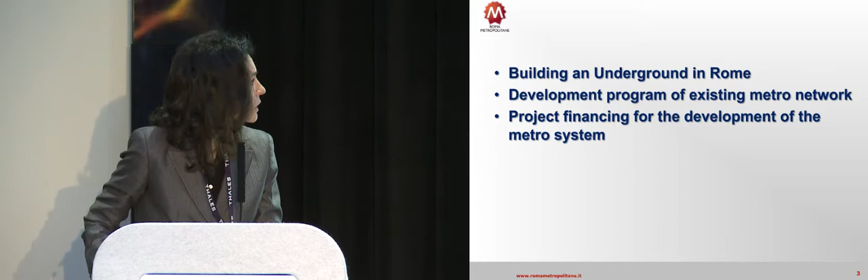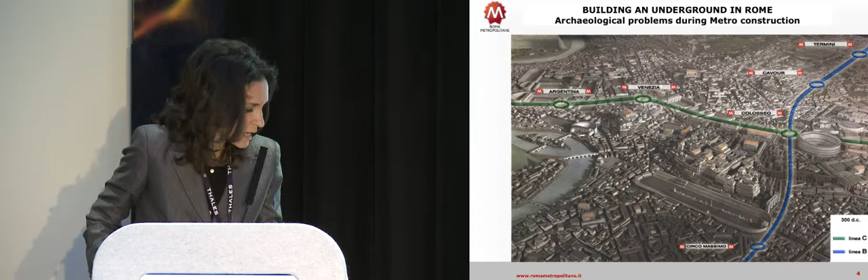This is nice for me, thinking that we are going to live over all this stuff in Rome.

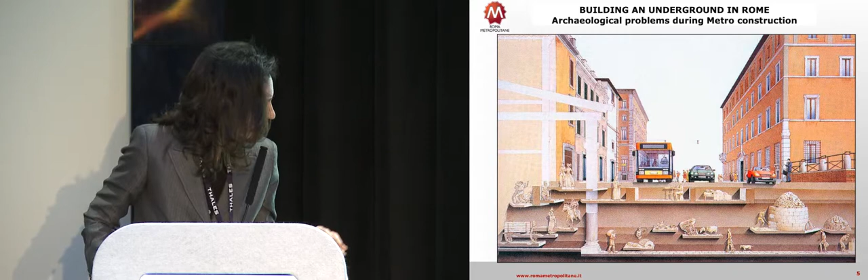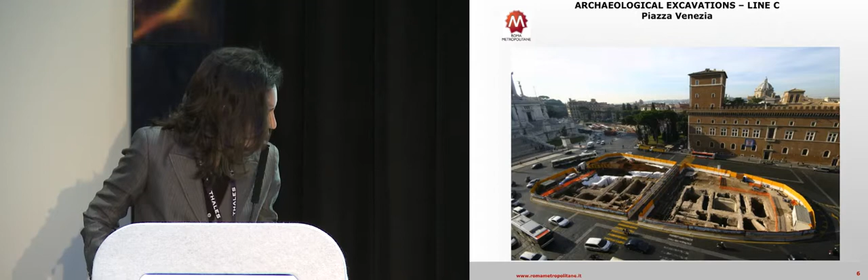These are some archaeological excavations preliminary to the excavation of the station in Piazza Venezia. You can see Altare della Patria. These are some walls of ancient buildings before the excavation of Via dei Fori Imperiali. Thus we have the walls of the building, Palazzetto Venezia, medieval age, and Piazza Madonna di Loreto, in front of the Altare della Patria.

In Rome we have up to 15 archaeological layers, each one connected with a specific age, from prehistoric on Palatino Hill to imperial, archaic or medieval, Renaissance, Baroque, and so on.

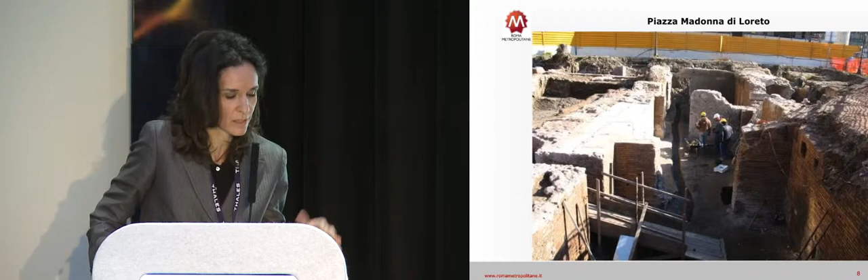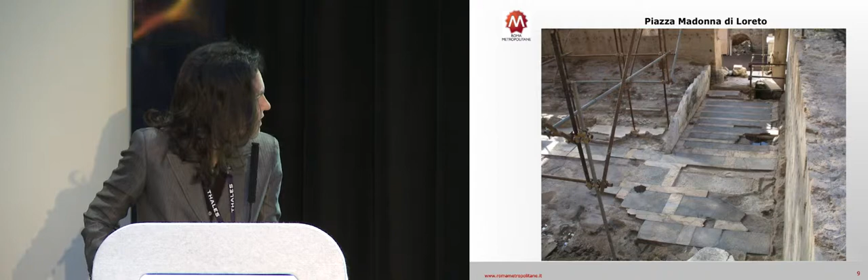This is some marble pavement in Piazza Madonna di Loreto. This is the reconstruction of the Athenaeum of Imperatore Adriano in Piazza Madonna di Loreto.

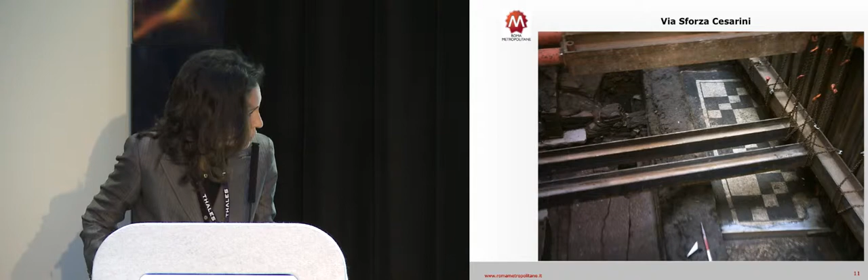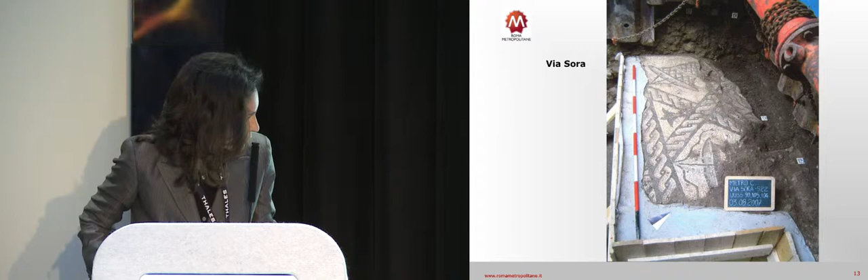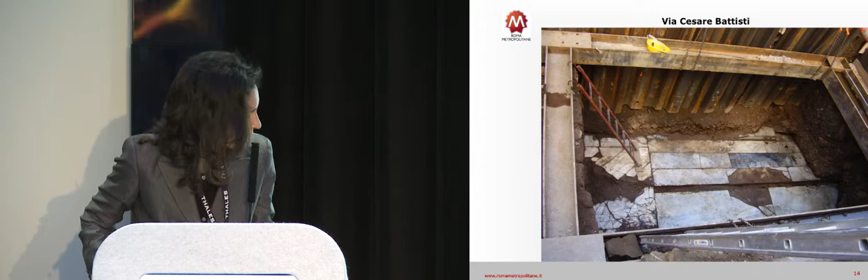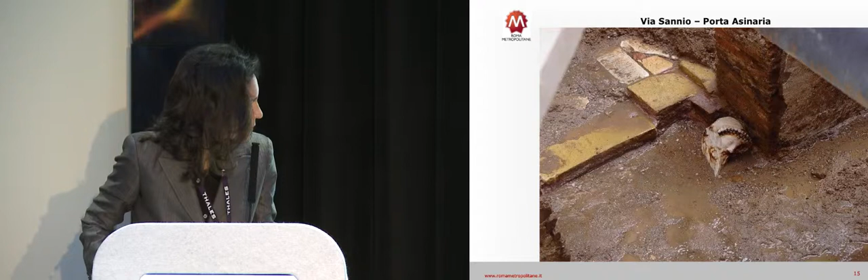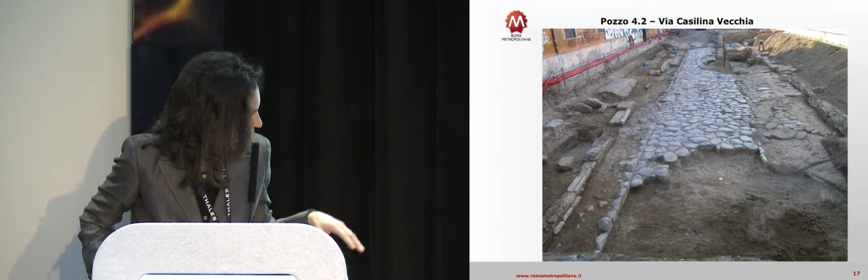This is some Roman amphoras in Largo Brindisi, next to San Giovanni station. Via Casilina Vecchia, in correspondence with ventilation shaft 4.2, under this pavement we found the ancient Via Labicana. This is a panoramic view of that pavement.

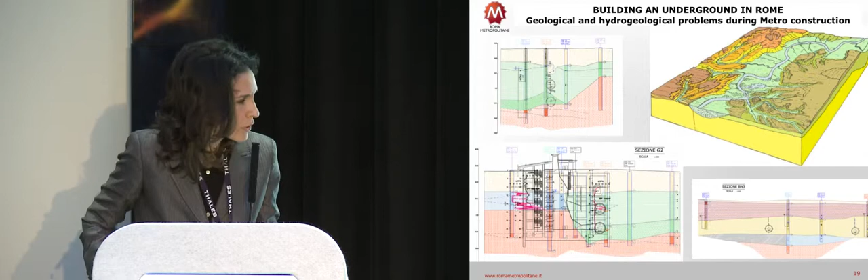Moreover, we have geological and hydrogeological problems, as Rome is in the Tevere Valley, so we have alluvial and recent sediment soil with very poor mechanical characteristics and high deformability, so we have to consider this fact in our design stage. Also, the water level is very high, and we have to keep the water level unchanged in the surroundings to avoid any settlement to buildings and ancient monuments.

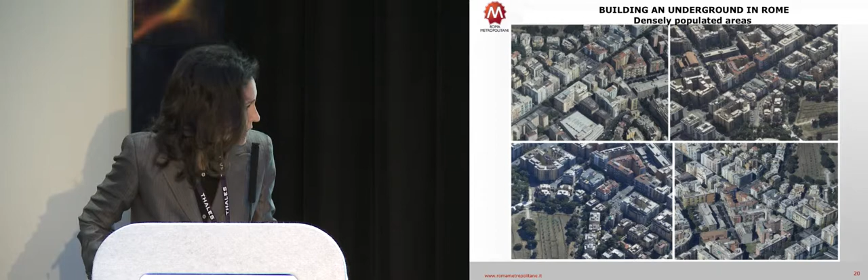Therefore, we have to consider that building an underground, we have to build it in densely populated areas, so we often have no place for working areas nor for stations.

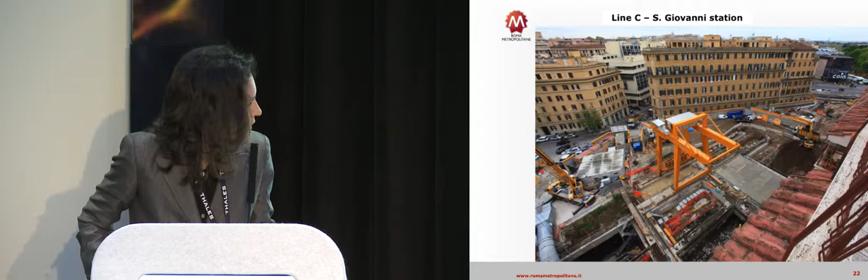Here we have some panoramic views of our works: San Giovanni station, Lodi station, along the C line under construction.

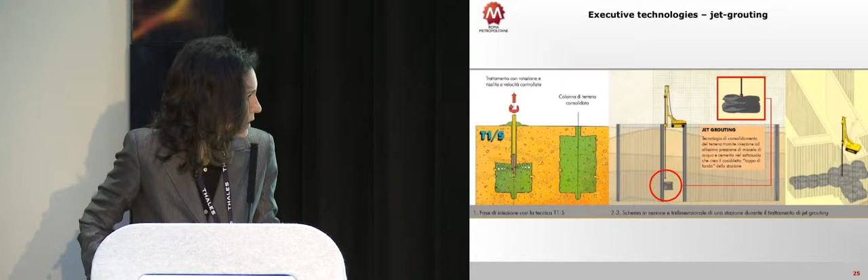We have to face all these problems with executive technologies like trench cutter. We have to build stations and ventilation shafts from the surface between diaphragm walls until 15 meters deep. We also have to use jet grouting at the bottom of the excavation to reduce permeability of the excavation and to improve mechanical characteristics of the soil.

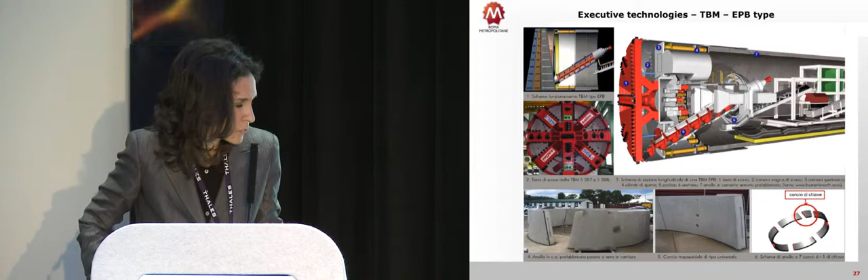We also use ground freezing and compensation grouting for buildings, and the tunnels are being dug with TBM, EPB type, to reduce settlement and to avoid any risk to monuments and buildings on the surface, and to avoid disturbing archaeological strata. Very deep, until 50 meters deep in the center of Rome.

The final result of all this effort are very livable stations, free of architectural barriers, and the internal passages are designed to be densely used, and when possible, are completely fully automated.

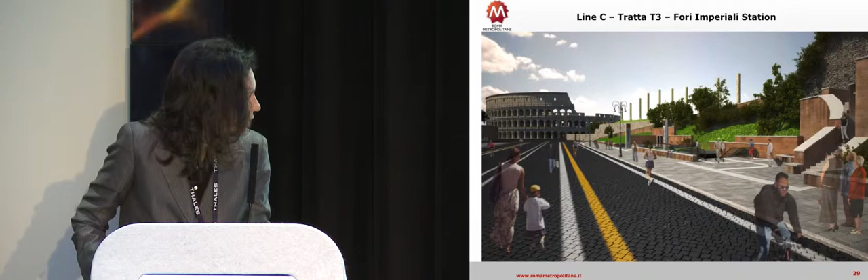In the center of Rome, escalators and stairways are completely uncovered to minimize and reduce the impact on the environment. Also, lifts completely glassed in are located so as to avoid impact with the locations.

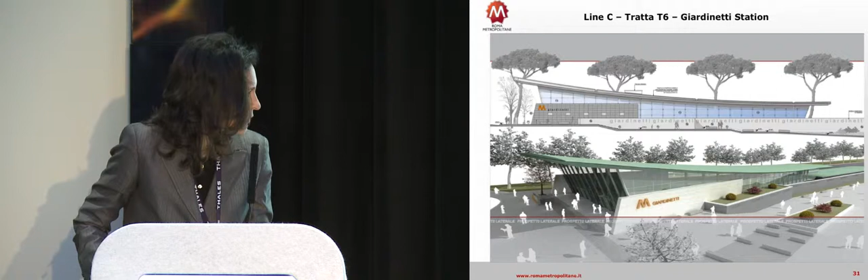In the suburbs, stations are planned to be strongly recognizable, a sign for the urban environment, places of urban aggregation. All material, finishing, and signage are planned to give a sense of unity and also comfort for passengers.

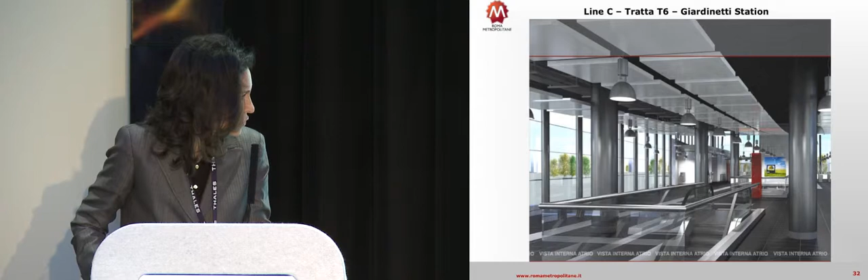All the stations are planned to be safe, as Line C will be the first line in Rome using the safest and most efficient system, as it will be fully automated with platform doors that will open only when the trains arrive in stations. The system will also increase capacity, as trains will be more frequent when requested by demand at peak hours.

We also have a system of video surveillance in and out of the stations and into the trains. We have a Wi-Fi system to receive and transmit telephony data, and this will be extended from Line C to all the stations and to the whole network.

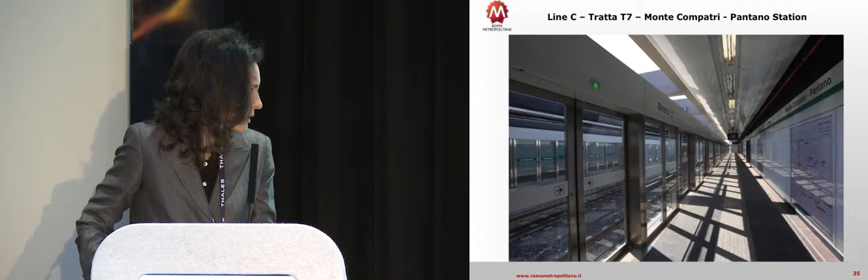This is a view of our developing plan. Under construction, we have this.

Our Line B1, from the existing Line B station Bologna to the external Great Ring Road, is 9 kilometers of tunnels for 9 stations, and this part from Bologna to Stazione Ionio is under construction. Functional tests are in course. This part of the line is in the approval and financing phase.

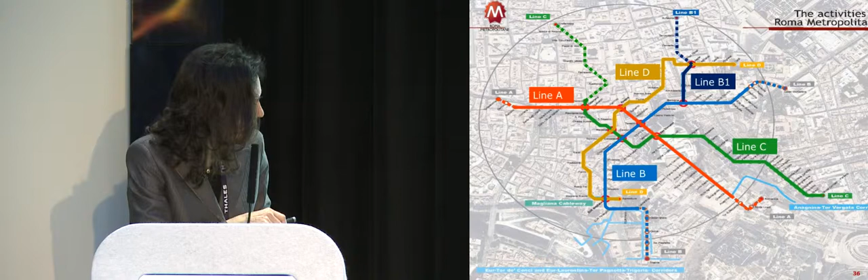Then we have the fourth line, Line D. It connects the dense neighborhoods to the south to the northwest part of the city. We also have the extension of Line A: 2 stations, 2 kilometers of tunnel.

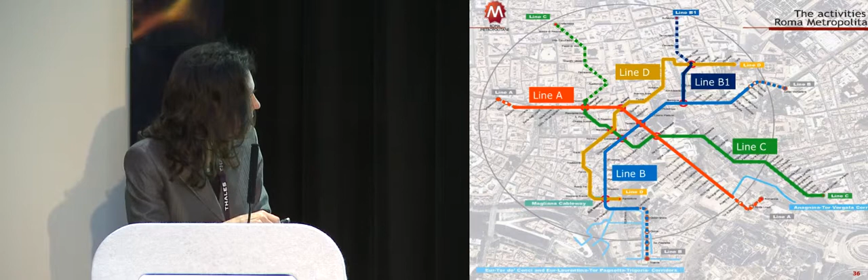Then we have also planned this track, from Clodio Mazzini to Grotta Rossa, around 9 kilometers of tunnels. And we have the current work, Line B1 and Line C.

The first part to be opened is the track from Monte Compatri Pantano to Parco di Centocelle, 15 stations. Then at the end of 2014 will be opened the track between Parco di Centocelle and Lodi Station. At the end of 2015 will be opened this last track.

At the end of 2017, the track will be opened until Colosseo Station.

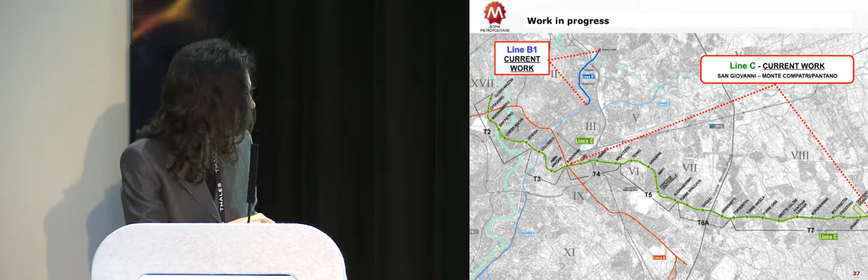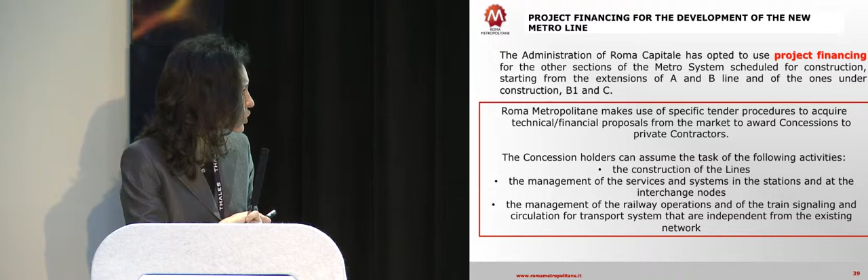Probably the C line will be the last big work fully financed by public administration. So the administration of Roma Capitale has opted to use project financing for the other sections of the metro system, starting from the extension of Line A and B and the ones under construction, B1 and C. Roma Metropolitane makes use of specific tender procedures to acquire technical and financial proposals from the market to award concessions to private contractors.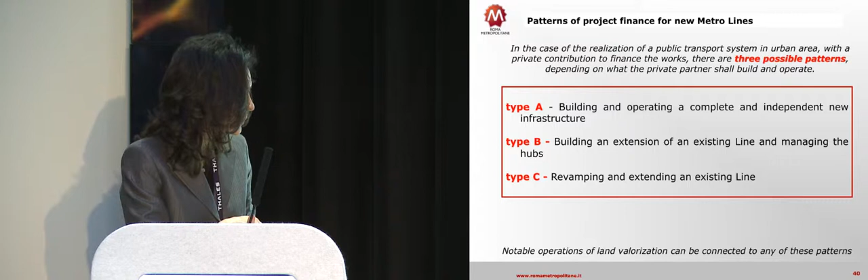We used to say that we have three different patterns of project finance for new metro lines. Type A: building and operating a complete and independent new infrastructure. Type B: the partner builds an extension of an existing line and manages the hub. Type C: he revamps and extends an existing line.

In pattern type A, we have the case of line D, which is the most suitable for an independent metro line. It's the clearest pattern from the point of view of the transfer of management risk, because it avoids any confusion in the allocation of responsibility when a disservice occurs. So for line D, the concessionaire will conduct preliminary investigation, develop the project, build the line, operate the rail system, and manage the service of the station and hubs for a 20-year concession period.

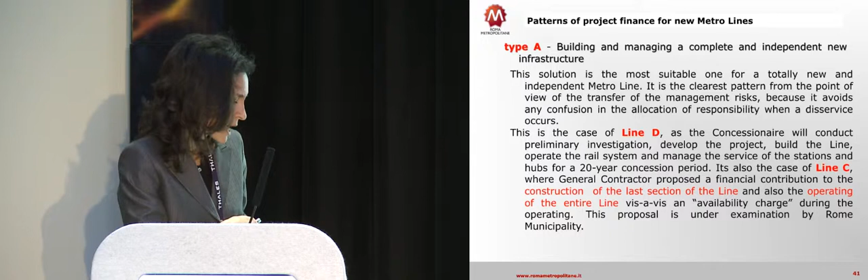It's also the case of line C, where the general contractor proposed a financial contribution to the construction of the last section of the line from Clodio Mazzini, for the line from Venezia to Clodio Mazzini, and also the operating of the entire line vis-à-vis an availability charge during the operating. This proposal is actually under examination by Rome municipality.

For type B, the private partner in the station and hubs provides the maintenance and the surveillance of structure and plants. It can also provide a welcome service besides carrying out subsidiary commercial activities. Instead, the management of the transport service, including the purchase and maintenance of the rolling stocks, remains with the previous handler. This is the case of the extension of line B, B1, and line A.

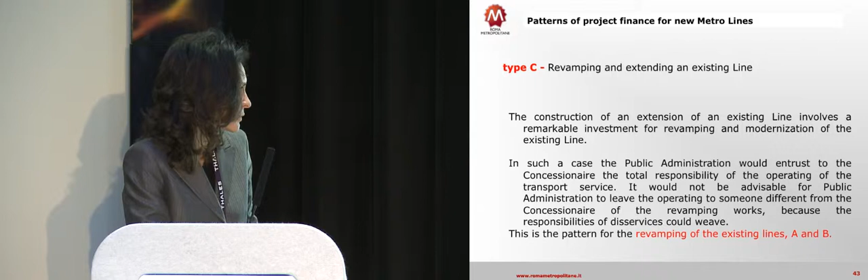In the third case, the construction of an extension line such as existing line A and B, the public administration would entrust to the concessionaire the total responsibility of the operating of the transport service. It would not be advisable for public administration to leave the operating to someone different from the concessionaire of the revamping works, because the responsibilities of the disservice could weave. This is the pattern for revamping of the existing line A and B, as I said.

So, in 2005, Eurostat recommended that public-private partnership must respect both the following conditions. The private partner has to bear the construction risk. It's a guarantee of compliance with the envisaged time schedule and cost over the implementation phase.

The archaeological risk remains charged to the municipality of Rome. The private partner bears at least one of either availability or demand risk. In Rome, we are going to build an underground in high-intensity populated areas, so demand is unchanged, as the fare is fixed and very low. Without choice and a very low price, people will continue in every case to use the metro.

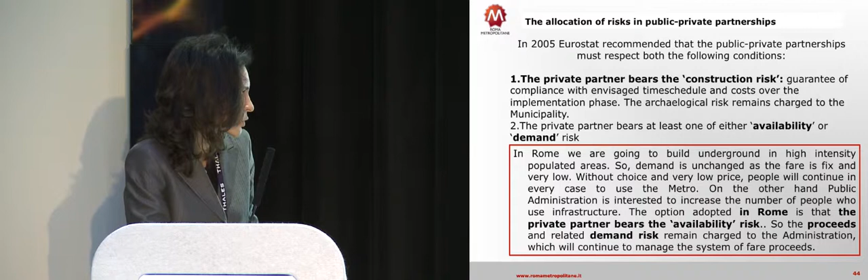On the other hand, public administration is interested in increasing the number of people who use the infrastructure. The option adopted in Rome is that the private partner bears the availability risk, so the proceeds and related demand risk remain charged to the administration, which will continue to manage the system of fare proceeds. This is the option that will allow the concessionaire to adopt the most efficient behavior in the operating of the service. Its profit will depend on the achievement of the standard of service established by the conceding administration.

Finally, the construction of the new transport system, or the enhancing of the existing one, improving accessibility of the territory, and increasing the value of lands and buildings interested by it, could render notable operations of land valorization sustainable, using the instruments of 'variante' permitted by the City General Plan, that is, changing the land use plan. This way to proceed has been challenged by local committees, which oppose this relevant change of land use.

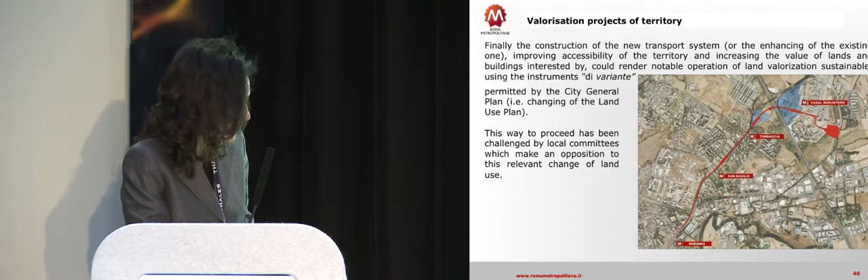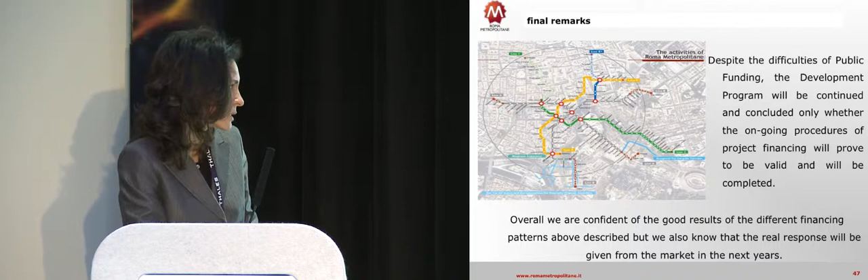So despite difficulties of public funding, the development program will be continued and concluded only if the ongoing procedures of project financing prove to be valid and are completed. Overall, we are confident of the good results of the different financing patterns described, but we also know that the real response will be given by the market in the next year. Thank you very much for your kind attention.